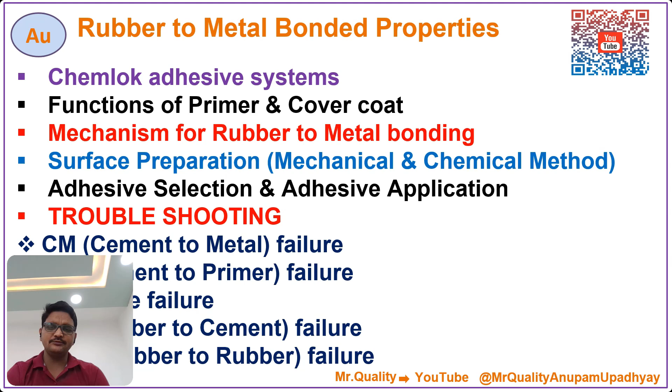Hello friend, today we are going to discuss rubber to metal bonding properties. In this session we are going to discuss the Chemlok adhesive system, functions of primer and cover coat, the mechanism for rubber to metal bonding, and surface preparation. What are the methods of surface preparation, like mechanical method and chemical method, adhesive selection and their applications, and troubleshooting like cement to metal failure, cement to primer failure, rubber to cement failure, and rubber to rubber failure.

First is the Chemlok adhesive system. In the Chemlok adhesive system, we have two systems. First is the primer and cover coat system, for example Chemlok 205 plus Chemlok 220 or 6220 or Chemlok 6125. The primer is Chemlok 205 or 207, plus a Chemlok adhesive like Chemlok 220, Chemlok 6220, Chemlok 6125 or the Chemlok 6100 series.

This means there are two layers: first is the primer and second is the cover coat layer, and the primer is Chemlok 205 or 207 in this example. In the single coat Chemlok system, there are Chemlok 250, Chemlok 202 ABC, Chemlok 607 and Chemlok 5151. These Chemloks are for the single cover coat system.

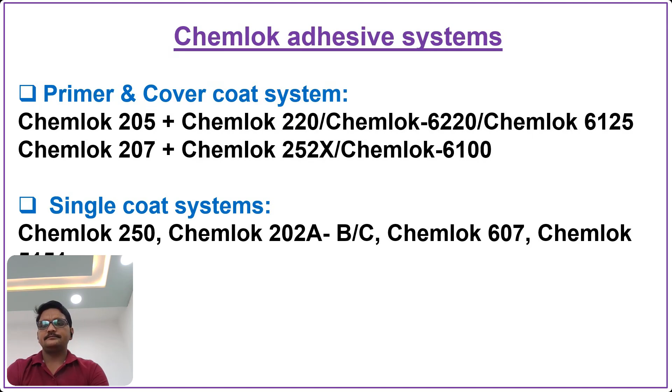Now, functions of primer. The primer provides heat and corrosion resistance, provides adhesion with the metal surface, reacts with the cover coat, and differs in color; some primers are gray, some are blue, like this.

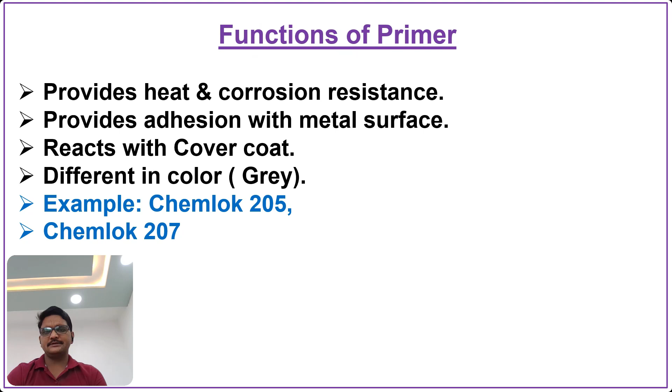Next is the function of cover coat. Cover coats are adhesives. The cover coat reacts with unsaturation in the polymer backbone, reacts with primer ingredients, and cross-links with the adhesive polymer. Examples are Chemlok 220, Chemlok 6125 and Chemlok 6100.

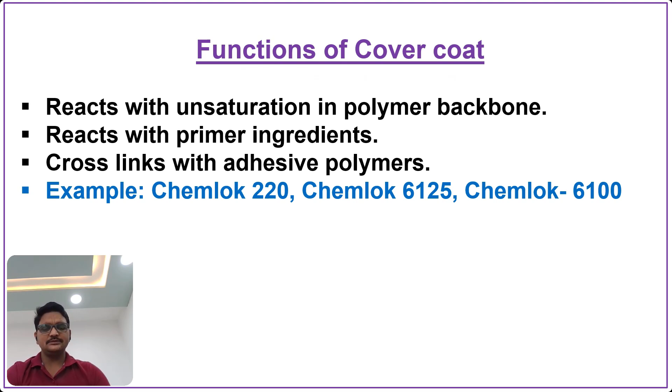Now next is the mechanism for bonding. What is the mechanism for rubber to metal bonding? First we have the metal, then we apply the primer, above the primer we apply the cover coat or adhesive, and the next layer is the elastomer layer.

First we need to prepare the metal surface, then we apply the primer, then after the primer dries we apply the cover coat or adhesive, then after the adhesive or cover coat dries we apply the elastomer, in the molding session or elastomer application.

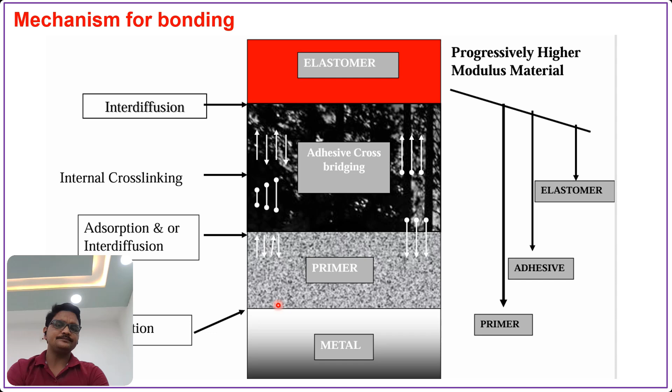Now next are the steps in rubber to metal bonding. The first step is surface preparation, meaning we need to prepare the metal surface well. Next is adhesive selection. After metal surface preparation, we need to select the type of adhesive we are going to use, like which primer and which cover coat chemical.

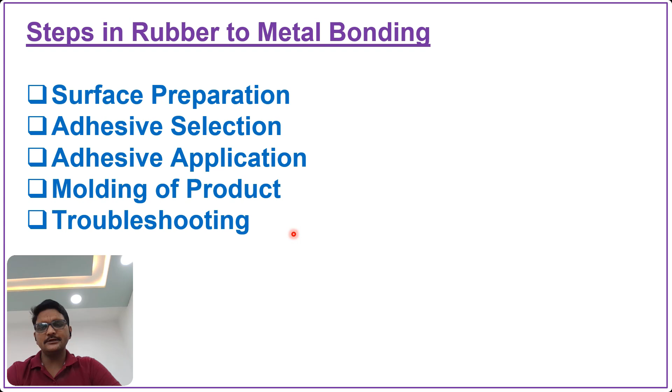Next is adhesive application. What are the adhesive applications? Next is molding of products. How are we going to produce the product? What are the molding conditions? And next is troubleshooting: what are the failures in rubber to metal bonding?

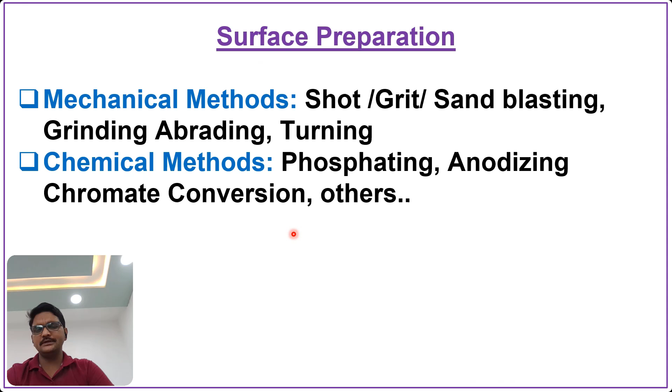Next is surface preparation. Surface preparation is of two types. First is the mechanical method, second is the chemical method. Shot blasting, grit blasting, sandblasting, grinding, and turning are the mechanical methods. Phosphating, anodizing, and chromate conversion are the chemical methods.

Surface preparation by mechanical method. The first step is degreasing. Degreasing means removing oil, grease and rust from the metal surface. Then grit blasting, with the type of grit we can use, like aluminum grit for aluminum and steel grits for steel. After grit blasting, we clean the metal surface.

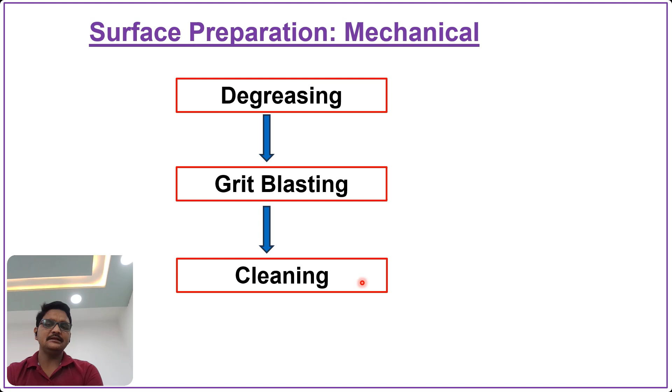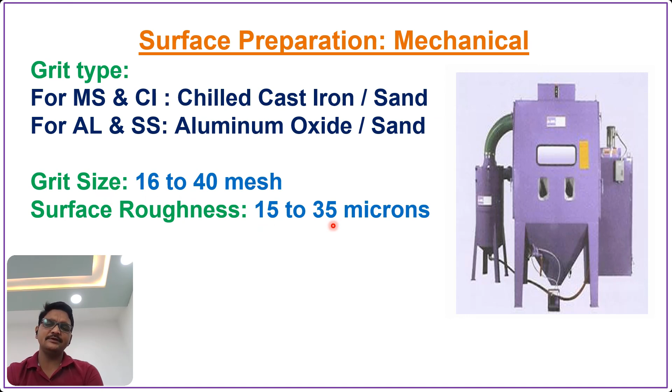Next is surface preparation by mechanical method. This is an example of shot blasting. Grit type is mild steel and chilled cast, or we can use sand also. For aluminum and SS, we can use aluminum oxide or sand. Grit size is 16 to 40 mesh, and we can prepare a surface roughness of approximately 15 to 35 microns.

Now, blast media. Grit blast media is angular in shape, with sharp cutting edges and ridges like this. These are the angular shaped grit. Next is shot. Unlike the angular grit, shots are circular in shape and produce dimpled results like this.

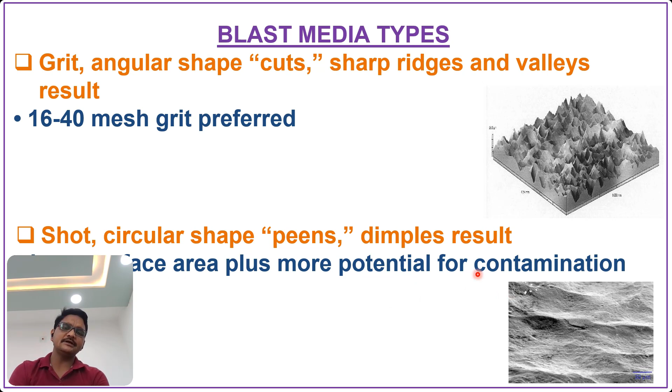Means less surface area plus more potential for contamination. These are for more potential for contamination. Now next is the properties or advantages of the mechanical method. First is it removes oxide and weld scale. Second is it's suitable for large metal and small lots, and no hydrogen embrittlement. Non-ferrous metal and mixed metal can also be used in the mechanical method. Thermoplastic, thermoset, and composites can be used in the mechanical method.

Now, the disadvantage of the mechanical method is poor layover time. Means after metal preparation, we can keep them maximum 4 hours. For mild steel and SS 4 hours, aluminum maximum 30 minutes, means half hour, and brass and zinc is 2 hours only. Means maximum we can keep the metal after the mechanical method is 4 hours shelf life.

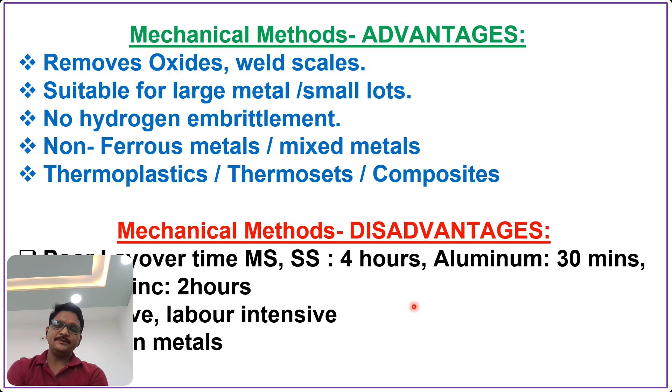After 4 hours of metal surface preparation, we cannot apply the primer or secondary on that metal. We need to do metal treatment on the surface again. Next is it's expensive and labor intensive also. And next is it warps thin metals.

Next surface preparation method is the chemical method. An example is the phosphating method. In the phosphating method, first we need to do alkaline degreasing. In alkaline degreasing, we are applying 10 to 15 minutes in proprietary chemicals. Means alkaline degreasing is with the chemical. And after that, water rinse, means wash the metal.

Then derusting. Derusting is by using phosphoric acid, and other acids can also be used. After derusting, again water is applied, means washing the metal, and then phosphating is done. Phosphating temperature should be 80 to 85, and the coating weight of phosphating is 150 to 400 milligram per feet square. Then again water is applied, and after that passivation is done.

Passivation is chromic acid passivation. That time is 30 to 45 seconds, and temperature is 70 to 80 degrees centigrade. After that drying is applied. Drying means oven drying or air drying is applied.

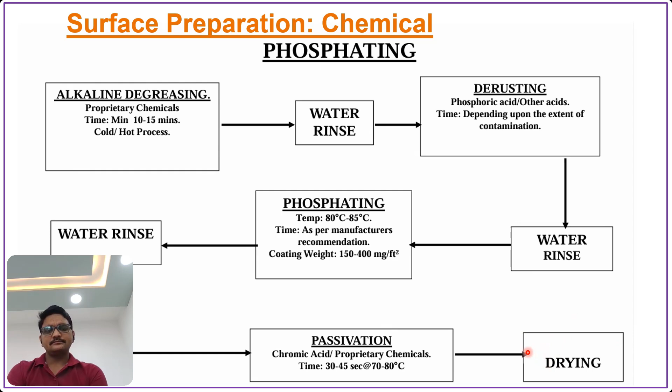Now, the advantage of the chemical method is better layover time. Means we can keep the metal after chemical treatment approximately 48 hours, minimum 24 hours. We can keep the metal 24 hours to 48 hours. More economical in large volume. If our storage condition is very good, then we can keep metals 3 to 4 days also.

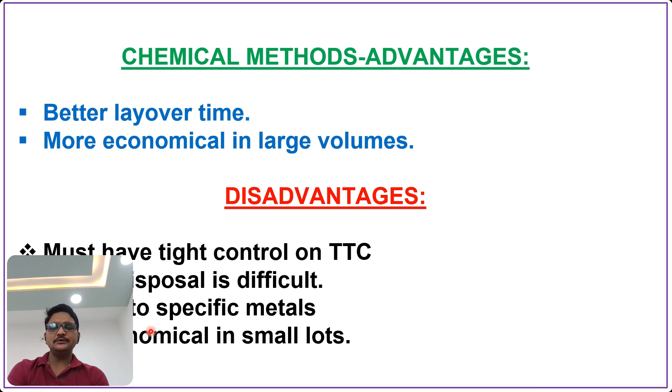Disadvantages: must have tight control on TTC. Waste disposal is difficult. Limited to specific metals. Not economical in small lots.

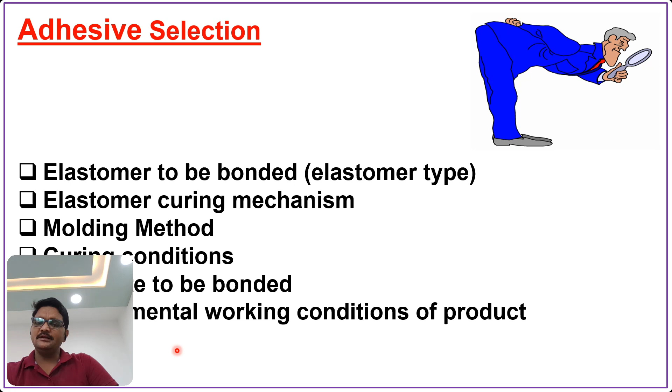Next is molding methods. What are the molding conditions and molding parameters, time, temperature, like that. Curing conditions, substrate to be bonded, and environmental working conditions of the product also. Next is the Chemlok grades, like Chemlok primer grades 205, 207, Chemlok 210, 219, Chemlok 220, 230 series, 250, 400, 600, 800. That is water based.

Next is some examples of general purpose primer, that is Chemlok 205. That is a primer for all metals, nylon, FRP, and plastics. Good environmental resistance and operating temperature range of minus 40 degrees centigrade to 120 degrees centigrade. That is low actually in comparison to Chemlok 207. Chemlok 207 is a heat resistant primer.

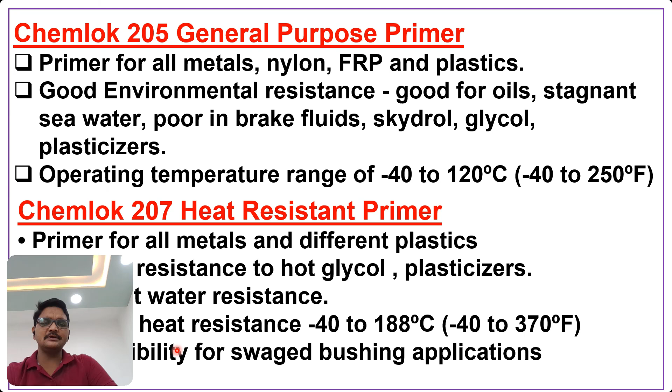Its heat resistance is minus 40 degrees centigrade to 188 degrees centigrade. Means we can apply a molding condition of 188 degrees centigrade. They perform better. And better salt water resistance, excellent resistance to hot glycol and plasticizer, primer for all metals and different plastics. Now next is the EPCA grades.

Some of the grades of Chemlok, like Chemlok 220, now become 6220. Actually 6 is a prefix that tells us it is lead free Chemlok. Like Chemlok 6125, previously known as Chemlok 125, now becomes 6125. That is lead free Chemlok. Chemlok 225X series, like 6225, and Chemlok 252, that is the 6100 series. Chemlok 252 HX series, that is 6108 Chemlok, like that.

Now some Chemlok is general purpose Chemlok, cover coat or adhesive, that is Chemlok 220, 6125, and 6220. Chemlok 220 and 6220 are the same, but the 6 shows that Chemlok 6220 is lead free Chemlok. And these Chemloks are general purpose adhesives or cover coats.

This is a good economic choice for industrial applications on bonds: natural rubber, styrene butadiene rubber, and nitrile butadiene rubber, and chloroprene rubbers, like acrylic rubbers. High sweep resistance and difficult to bond soft compounds. Pre-cures if molding temperature is greater than 170. Means there is a molding temperature limitation in 6220 compound or adhesive or cover coat.

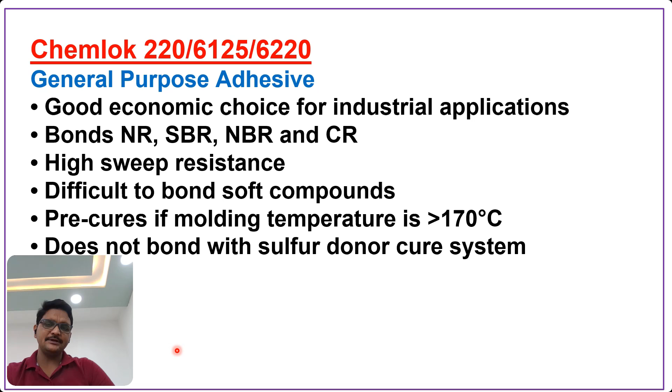Does not bond with sulfur donor cure systems. Meaning peroxide cure system and sulfur donor cure system. Sulfur donor cure systems have less bonding, not bonding properly with 6220.

Now, next is the Chemlok 6100 series or 6108. That is a general purpose adhesive, a heat resistant adhesive or cover coat. It is a more versatile Chemlok adhesive that bonds various compound cure systems and elastomer hardness values. High prebake resistance, high temperature resistance, good environmental resistance, good dynamic performance, bonds low hardness compounds also, bonds cured rubber to uncured rubbers, good swaging resistance, good heat resistance also. Means these are very good Chemloks for heat resistance, temperature resistance, environmental resistance, like that.

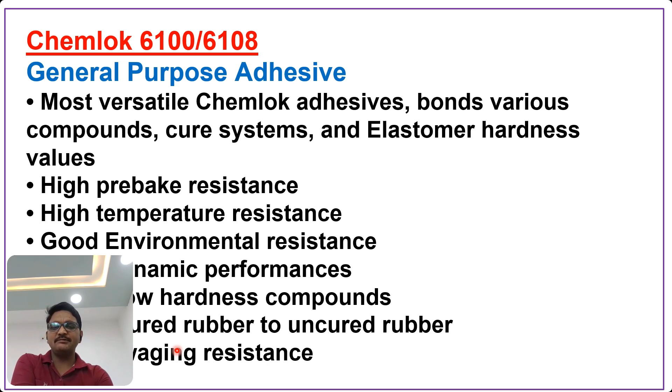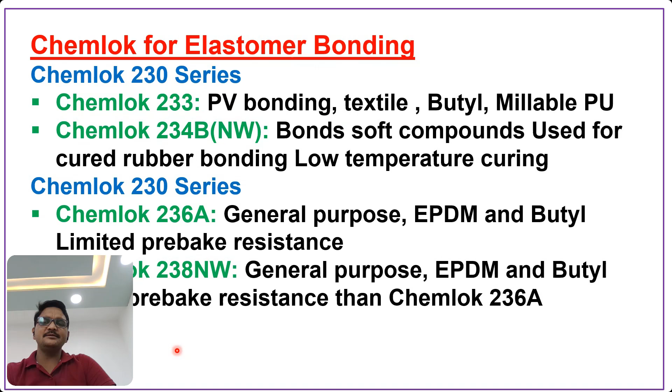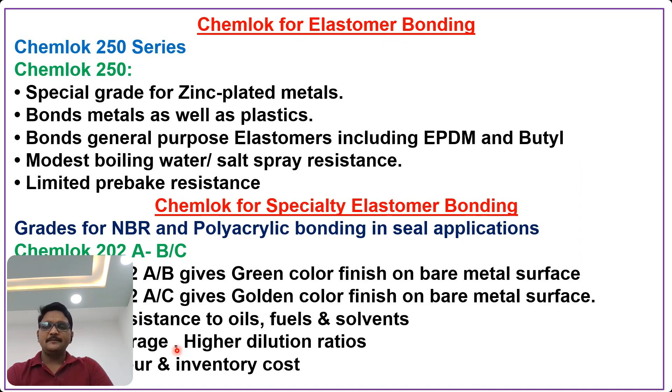Chemlok for elastomer bonding, there are different Chemloks. There is the 230 series, and another Chemlok is the 230 series. Chemlok for elastomer bonding like the 250 series, that is a special grade for zinc plated metal. Chemlok for elastomer bonding, the specialties in Chemlok, that is a grade for NBR and polyacrylic bonding for sealing applications, that is the Chemlok 202 ABC system. Now Chemlok application, adhesive applications.

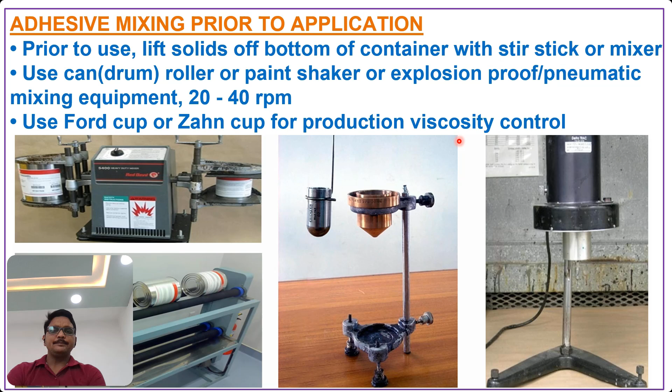In the Chemlok adhesive application system, we need to first understand the adhesive mixing prior to application. Now, prior to use, we need to first lift solids off the bottom of the container with a stirrer or mixer. Means we can apply a stirrer or drum roller or paint shaker before use, and the RPM is 20 to 40 RPM, and we can use a Ford cup or Zahn cup for viscosity control or viscosity measurement.

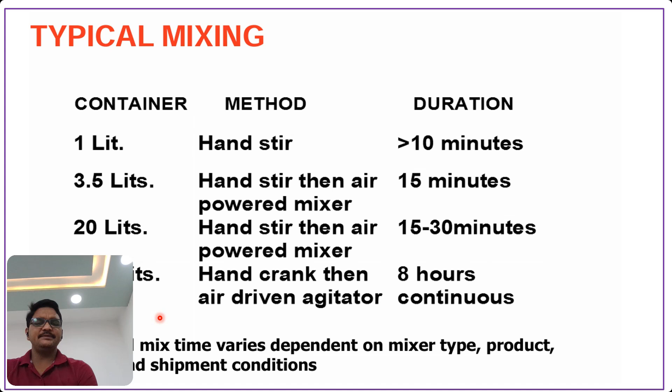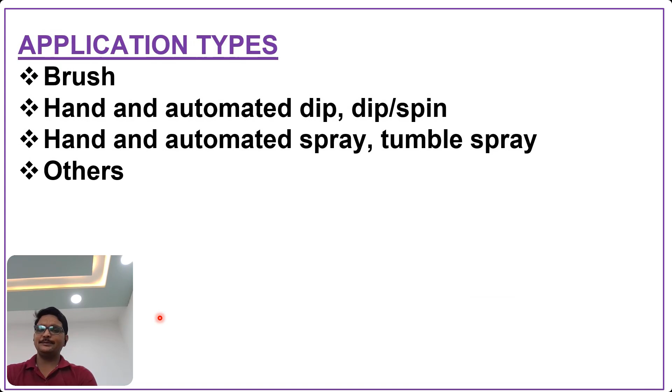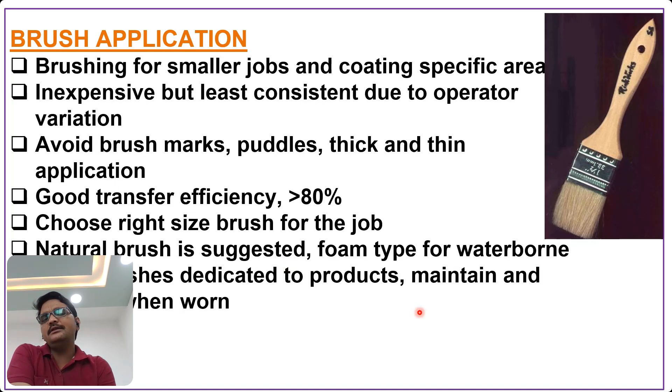Now the types of application: brush, hand or automatic dip spin, hand or automatic spray, tumble spray, and others. This is the brush application. Brushing is for smaller jobs and coating specific areas. It is inexpensive but least consistent due to operator variation. Avoid brush marks, puddles, thick and thin application. Good transfer efficiency, greater than 80%. Choose the right size brush for the job. Natural brushes are suggested. Foam types are good for water-based types also. Keep the brush dedicated to the product. Maintain and dispose of it when worn out or damaged.

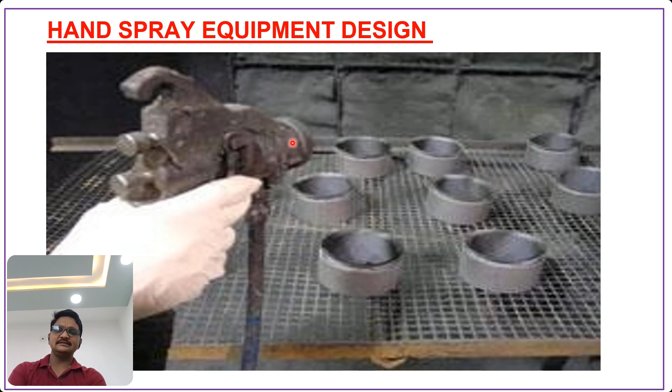Next is the hand and automated spray line application. This is the spray line. Now we need to understand the spray distance and spray gun size, what the nozzle size is, and what pressure we need to apply. The type of spray gun is high volume, low pressure. Nozzle diameter is 1 to 1.4 mm. Spray pressure is 30 to 60 psi, and the distance between spray gun and substrate is 15 to 20 centimeters.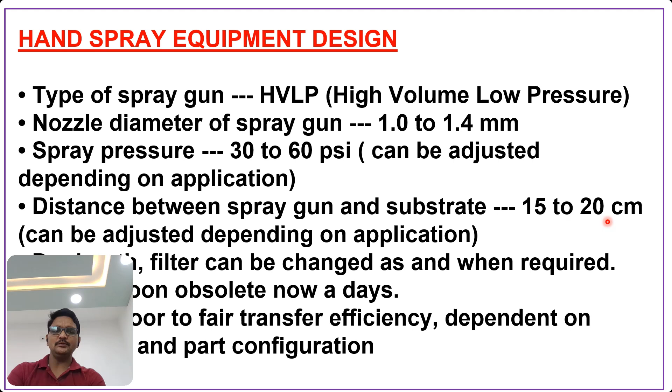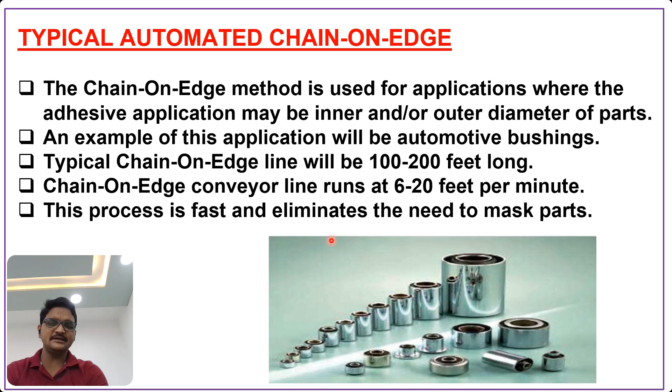Now, next is the typical automatic chain on edge, like this. The chain on edge method is used for applications where adhesive may be applied to the inner and outer diameter of the parts. An example of this application is automotive bushings. A typical chain on edge line will be 100 to 200 feet long with a 6 to 20 feet per minute conveyor line. This process is fast and eliminates the need for masking the parts. Now, this is the typical automated chain on edge design. This is the loading and unloading area.

Once the metal has already undergone mechanical or chemical treatment and primer application, we can now use the typical automated chain-on-edge design.

In this area we load the metal treatment done parts, then send them to the oven area for 5 to 10 minutes of oven application. Then we send it to the primer booth, where the metal surface is heated and we apply the primer.

After primer application by spray gun, manual or automatic, we send it to the oven area for drying the primer for 5 to 10 minutes. After drying, we apply the second layer, the adhesive or cover coat layer, by the adhesive booth by spray gun, manual or automatic.

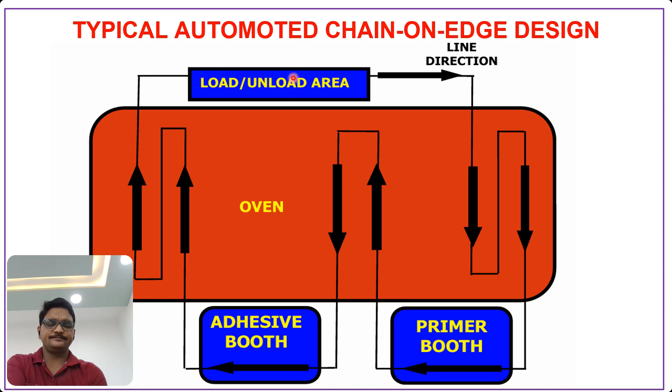Again we send it to the oven area for drying the adhesive application, which takes 5 to 10 minutes. After drying in the oven, the coated parts are sent to the unloading area. These are the typical automated chain-on-edge design applications.

Next is the adhesive DFT requirements. Typical guideline for measuring DFT, that is dry film thickness: we need to maintain primer at 5 to 10 micron, and top coat or cover coat or adhesive at 18 to 25 micron. Total two coat system should be 25 to 30 micron. Single coat also up to 25 to 30 micron, meaning 5 to 10 for primer.

18 to 25 for the top coat and cover coat. In total, 25 to 30 micron needs to be maintained for two coats and single coats. Next is the adhesive application.

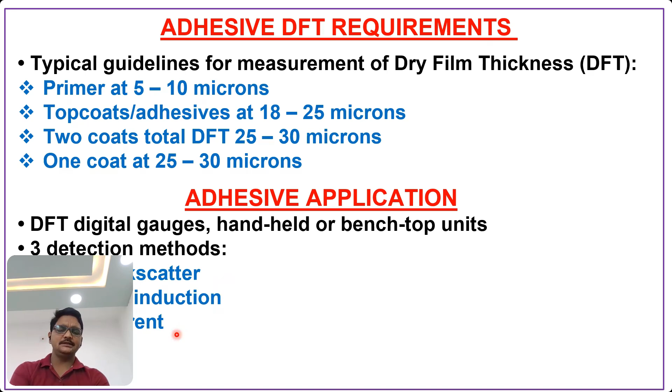For DFT digital gauges, handheld or bench top units, three detection method types of DFT can be used: beta backscatter, magnetic induction, and eddy current. This is an example of the DFT gauges. We can use this on the metal surface or metal top surface, and in this area we need to show the readings of the dry film thickness, like this.

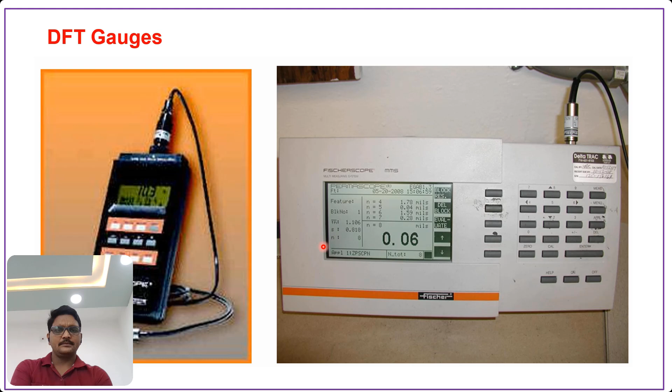Next is drying adhesive, meaning after the application of primer or adhesive, how much time duration is required. Typically 30 to 60 minutes for drying at room temperature between coats and before molding. After primer application and cover coat application, 30 to 60 minutes is also required for drying, to cool down.

Adhesive applications. Then we need to send the coated parts to the molding area for molding application.

Next is temperature and humidity in the plants, seasonal changes - that is also important. Lack of drying results, if Chemlok or adhesive is not drying properly, it results in blister failure to substrate. There will be higher chances of that.

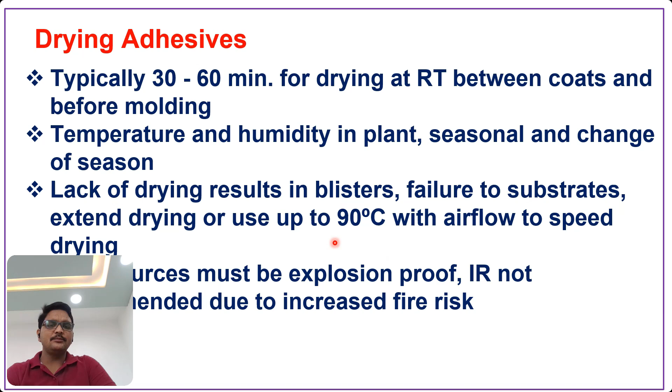We need to dry that coat at temperature 90 degrees with airflow to speed up the drying system. Heat sources must be explosion proof. IR is not recommended due to increased fire risk.

Next is handling coated parts. We need to avoid glove contact with wet products and coated parts. If gloves are contaminated, we need to remove and use new ones. Avoid throwing parts upon another due to potential chipping. Avoid placing coated metals on the floor also.

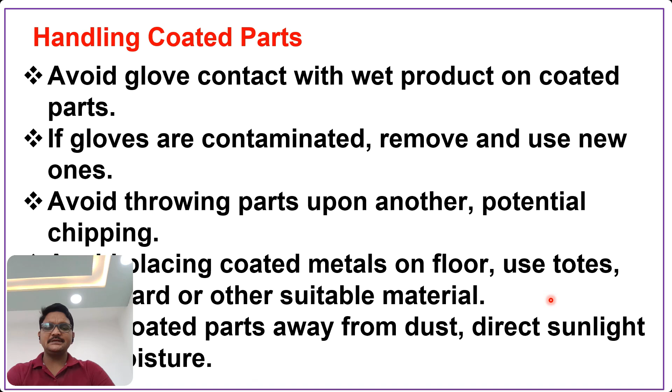Use totes, cardboards, or use other suitable materials. Keep coated parts away from dust, direct sunlight, and moisture also.

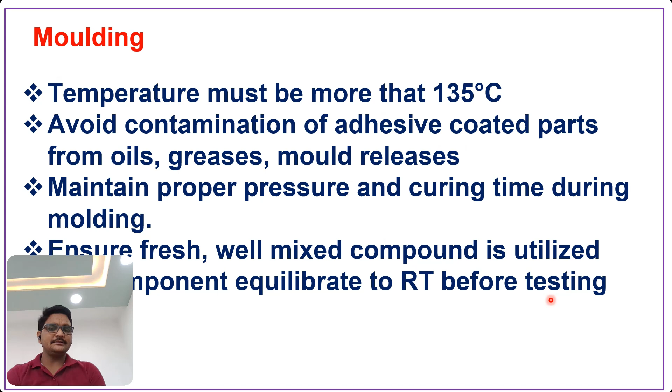Next is the molding conditions. Temperature must be more than 135 degrees centigrade. Avoid contamination of adhesive coated parts from oil, grease, mold release, etc. Maintain proper pressure and curing time during molding, and ensure fresh and well-mixed compound is utilized, and components equilibrate to room temperature before testing.

Now next is troubleshooting. For troubleshooting bond failure, following are the steps - this is per ASTM International failure modes and possible causes for these failures. First is cement to metal failure. In troubleshooting, we first study cement to metal failure, then cement to primer failure, then cohesive failure, then rubber to cement failure.

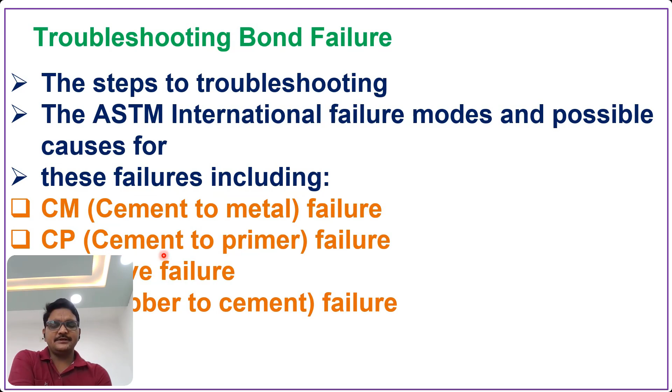First is troubleshooting bond failure per ASTM D429B, this type of failure like cement to metal failure. This one is the metal part, this one is the primer. The failure between the primer and metal is cement to metal. This is metal, this is cement. These are cements - now this is cohesive failure, meaning failure between the adhesive, failure between the primers.

Next is cement to primer. This one is the primer, this was the cement, now becoming this one the cement. This is metal, primer, and the failure between the primer and adhesive - that is cement to primer.

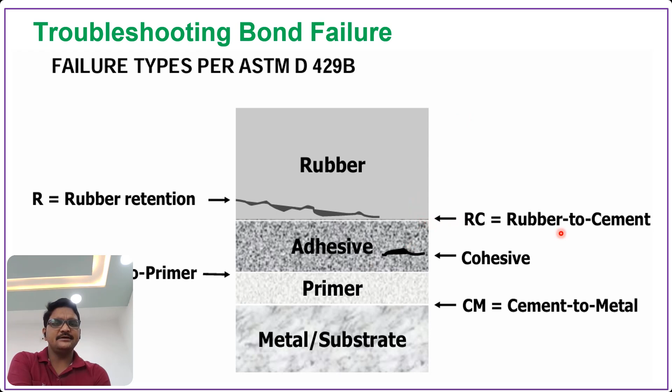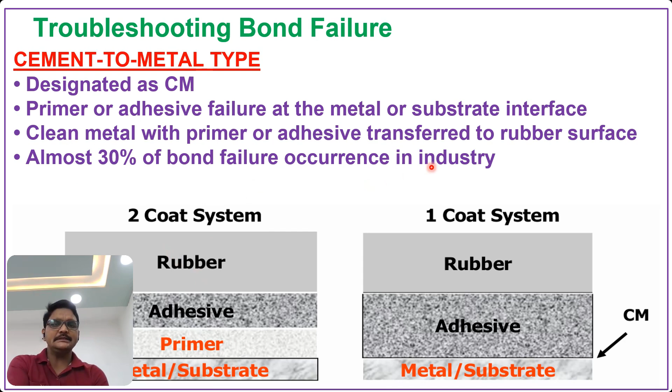Almost 30% of bond failures occur in the industry like this. This is the metal part, and this is the primer and cement parts. These are cement to metal failures.

What are the conditions of cement to metal failure? It may be poor metal preparation, meaning better chemical or mechanical cleaning is required. We need to check the degreasing operation, meaning the degreasing cell tank may be dirty or the chemicals may be degraded. Second, we need to check for dry spray, meaning we need to cob webbing and open the spray guns.

We need to check the spraying viscosity and adjust adhesive viscosity. We need to use a higher boiling diluent, reduce atomizing pressure, and adjust the proper position of the spray gun.

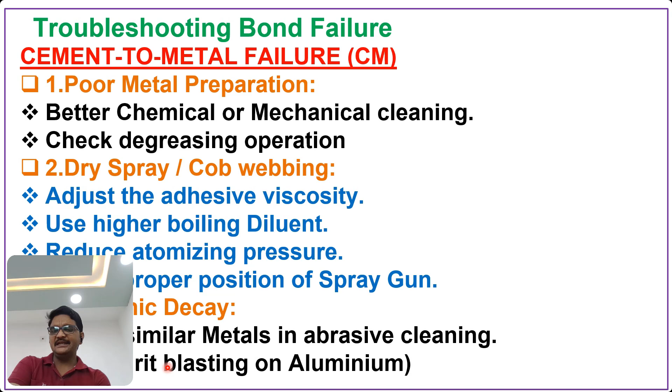Next is galvanic decay, meaning we need to avoid dissimilar metals in abrasive cleaning, like using an iron grit on aluminum parts. That's what we need to avoid.

Next is contamination of metal. Maybe the metal after preparation got contaminated, then cement to metal failure can happen.

Next is solvent entrapment in the adhesive film, meaning we need to allow longer drying time between the adhesive coats. After priming we need to keep them properly dry before applying the cover coats. A thick coat of primer, meaning the DFT (dry film thickness) of primer may be more than 5 to 10 micron, maybe 25 to 30 micron or 40 micron like that, can also cause this.

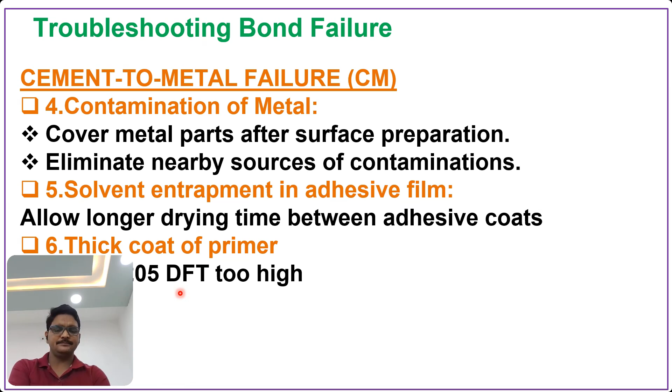Cement to primer type failure is designated as CP failure. The metal primer becomes cement, and the failure occurs between cement and primer. This is CP failure, which accounts for less than 5% of failures in the industry.

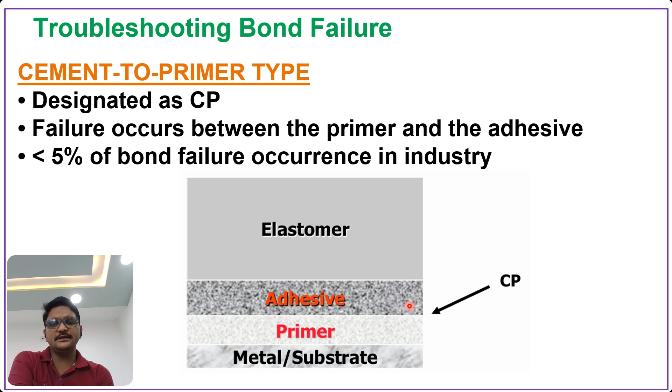Failure between the primer and adhesive at this location becomes the adhesive failure or cement to primer failure. The cause of this failure may be contamination of the primer, meaning after primer application the primer or Chemlok got contaminated.

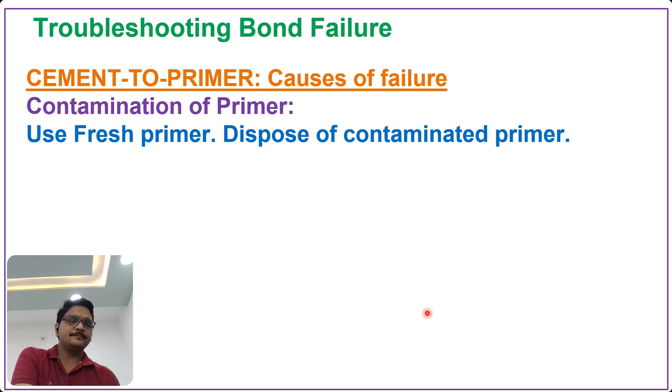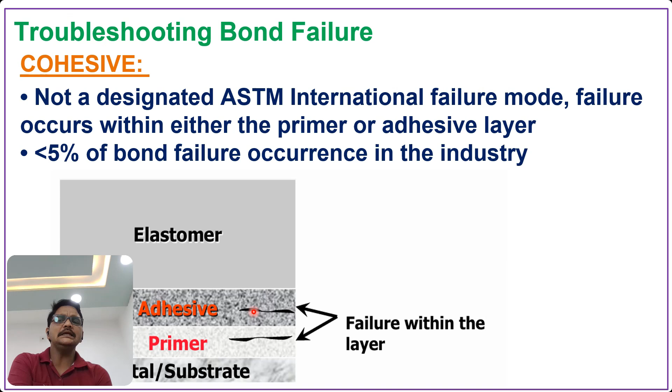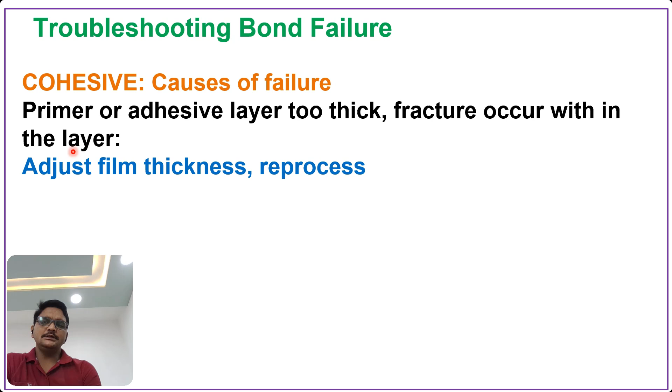The cause of cohesive failure is the primer or adhesive application DFT (dry film thickness) being too thick, meaning higher than 35 to 40 micron, like 50 to 60 micron observed. When this occurs, we need to adjust the film thickness and reprocess the metal.

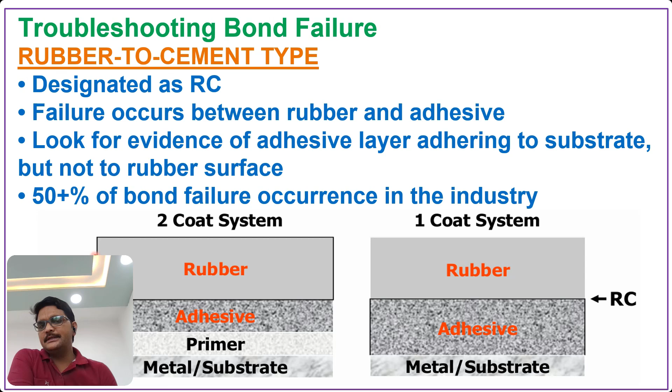These account for 50% plus of bond failures in the industries, meaning these are the major failures occurring in the industry. There is also designated RC failure where failure occurs between the rubber and adhesive, like this - the rubber is separated and the adhesive is separated.